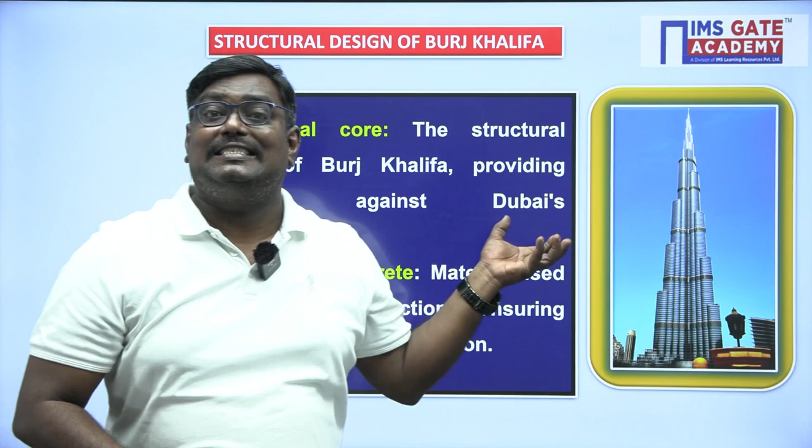Hexagonal core is a core which we are providing like a shear core or a shear wall. In a shear wall or a shear core, whenever there are winds, around 30% of the wind will be taken by shear walls, which you see in multi-story buildings around the lifts. But here, the hexagonal core will take almost 60% of the wind. And remember, this hexagonal core is entirely made up of RCC and this will also help to balance the weight.

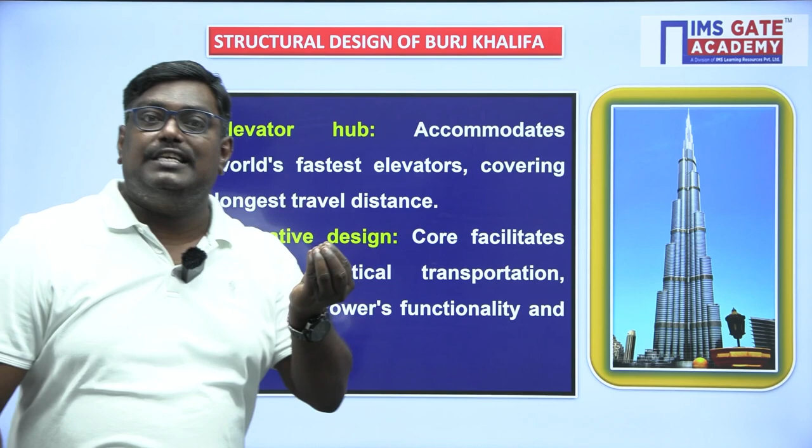So by providing this core, how is this area utilized? It has a height of 830 meters and in these areas we have fast moving elevators, fast moving lifts. The innovation made them utilize that core area for the lifts, an innovative design where the core facilitates efficient vertical transport, because it should be fast also.

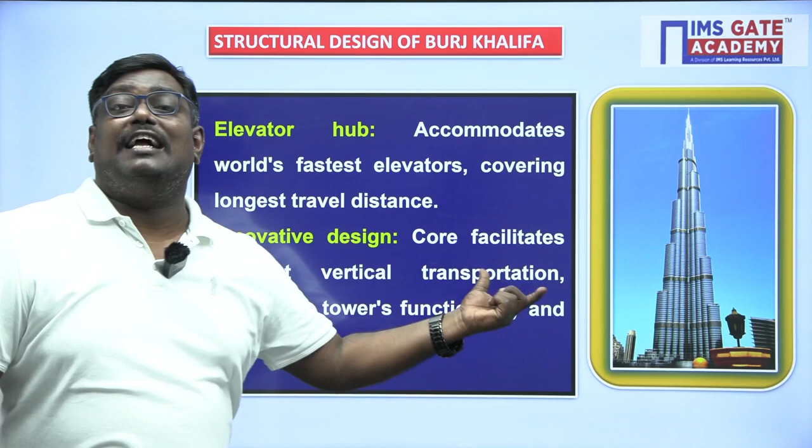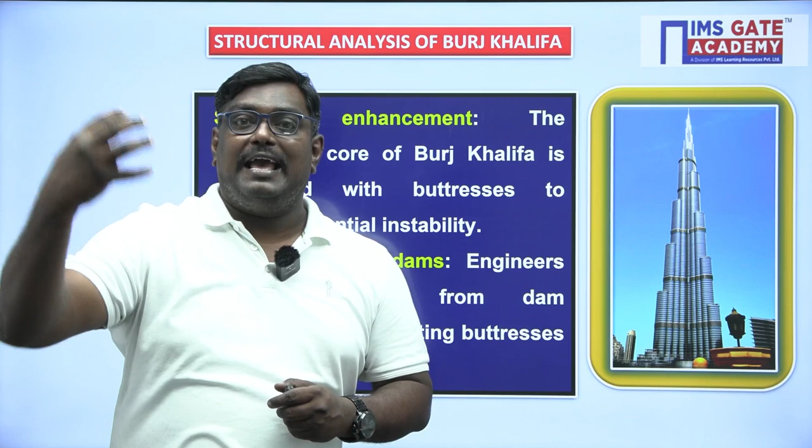Now coming to the structural analysis part. As I told you, we are talking about the slenderness. One innovation came from the designer: in dams, if you have a wall, you will be providing the buttress. So they collected the idea from there and implemented the buttress. By providing the buttress, they are trying to support the entire core. And the space is also utilized for corridors in a more efficient way.

If you see the stepped design, the buttress is a stepped shape design to accommodate the practicality of vertical towers around them. So this will also help to make the structure stable.

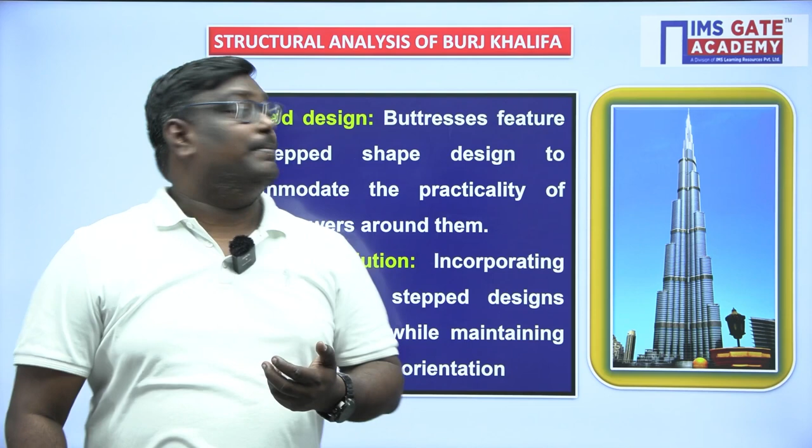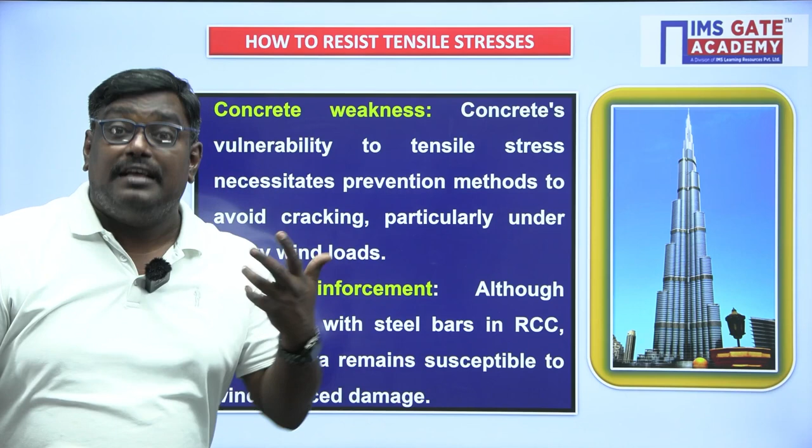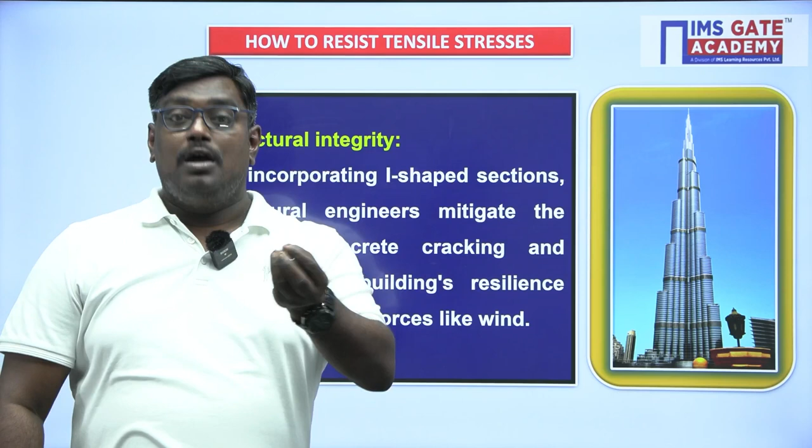Now coming to how to resist the tensile stresses. As you are aware, concrete is very weak in tension. By providing the steel in the core, some tensile resistance is improved. But how can these tensile stresses be resisted? Bending stress is equal to moment upon section modulus, so by providing more section modulus, we can reduce the bending stress. So they have come up with an I-shaped section, because I-shaped sections have more section modulus, and by that the bending stress will be reduced. So we should appreciate how the design came into picture by the designer.

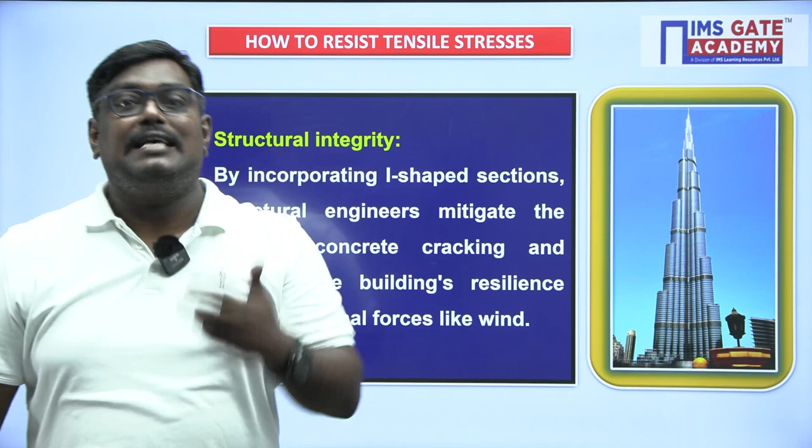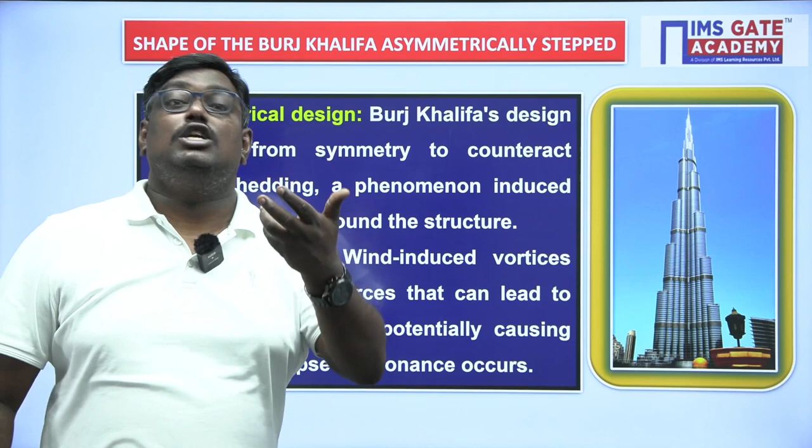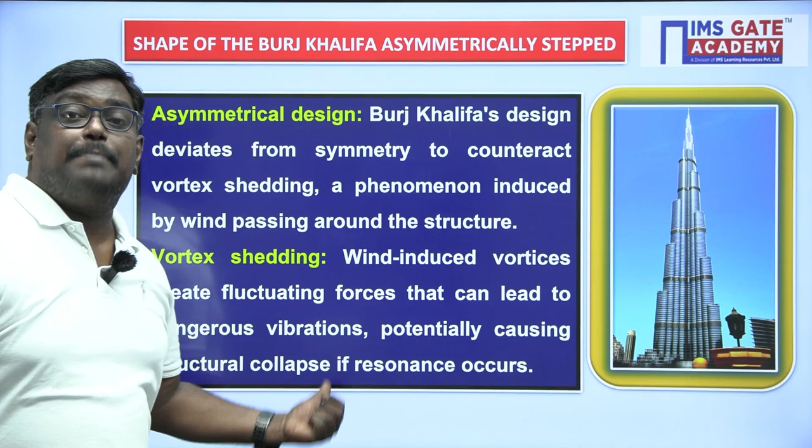Now, what is the shape here? The shape is asymmetrically stepped. Usually we are habituated to symmetric shapes. Why asymmetrically stepped? There is a concept called vortex shedding, where the building can sway here and there. The asymmetrical design overcomes the vortex shedding, because vortex shedding causes resonance. Wind induced vortices create fluctuating forces that can lead to dangerous vibrations, potentially causing structural collapse if resonance occurs. To avoid this, they have come up with the asymmetrically stepped shape.

Now, the core support: 70% is made up of RCC and the remaining top portion, 25%, is taken care of by steel. And in the top portion, with the help of the electrical engineers, they have taken care of the lightning also. And the upper portion can swing up to 6 meters, my dear students.

And let me tell you one important thing. Burj Khalifa is built in Dubai, where there is very loose sand. So they went almost 140 meters deep into the soil and built the raft foundation. Since that alone wouldn't be sufficient, they provided the piles, and on top of them, the raft foundation. By providing the raft foundation, they have taken care of the differential settlement. These are the main technical aspects of Burj Khalifa design.

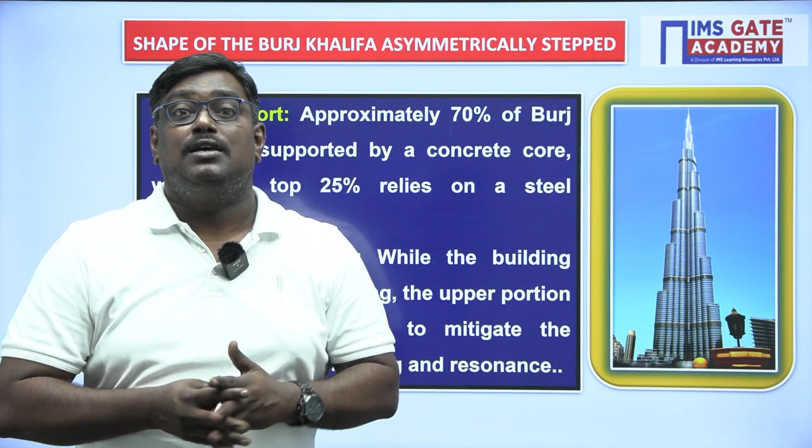I hope in this video you got an idea of the technical aspects of Burj Khalifa.